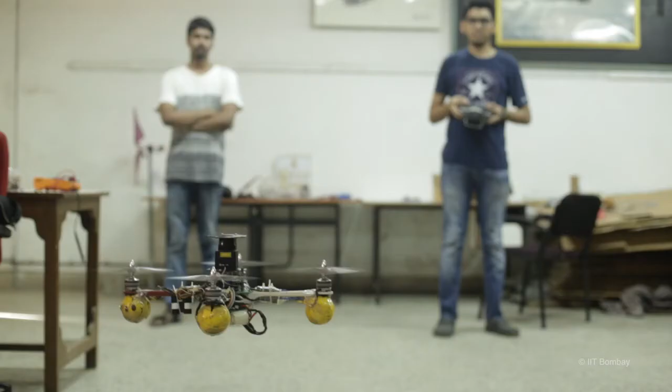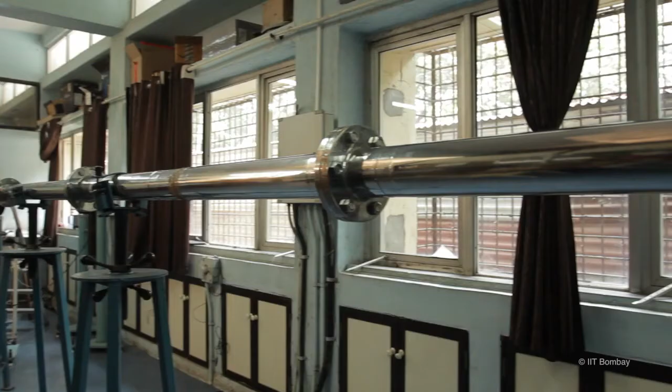Our faculty and students try to understand the mechanism behind these flying objects, and how to design and manufacture them. The discipline is divided into various sub-disciplines like aerodynamics, which deals with the forces generated because of air passing over a vehicle, propulsion, which gives thrust to the vehicle to travel, and dynamics and control, which is basically controlling the vehicle in air or on ground.

Aerodynamics deals with the motion of objects through air and the forces and moments that the air exerts on the body as it moves through air. For a typical commercial transport aircraft carrying 400 plus people and weighing about 400 tons, the primary aerodynamic forces one would be interested in are the lift force, which acts upwards and counteracts the weight of the aircraft, and the drag force, which acts like a penalty to moving an object through air.

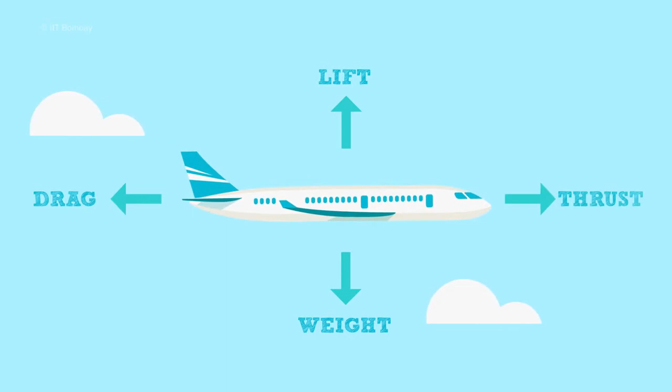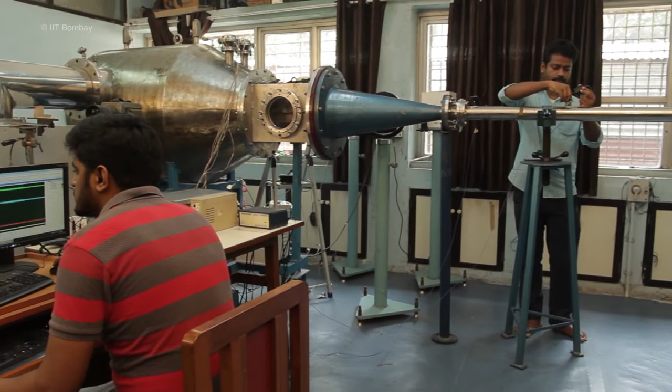The primary objective of a researcher in aerodynamics would be to design objects which produce the required lift force while at the same time maintaining minimum drag levels.

The propulsion problem is to make an engine that works efficiently over a wide range of conditions. We focus on a few aspects of this complex problem. An airplane engine generates thrust by adding energy to the air flowing through the engine, and this energy comes from the combustion of a fuel.

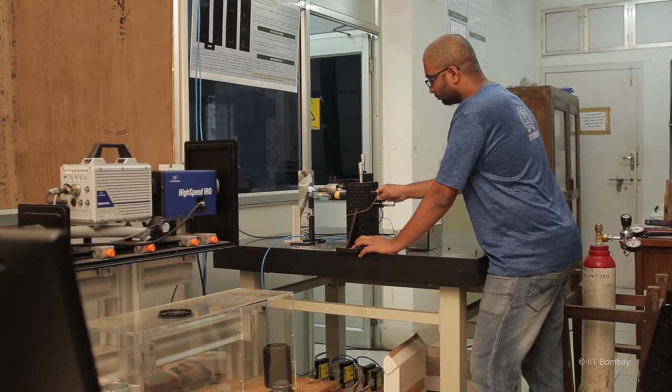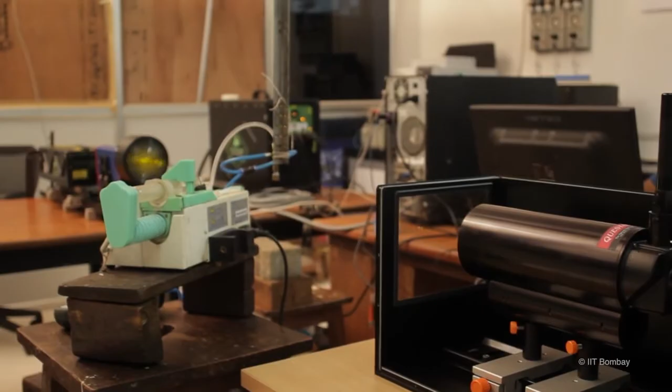Can we generate thrust with less pollution? The combustion groups are working on improvement in existing fuel injection strategies and novel concepts like flameless combustion to enhance engine performance. We are also interested in understanding the combustion instabilities that can cause engine failures.

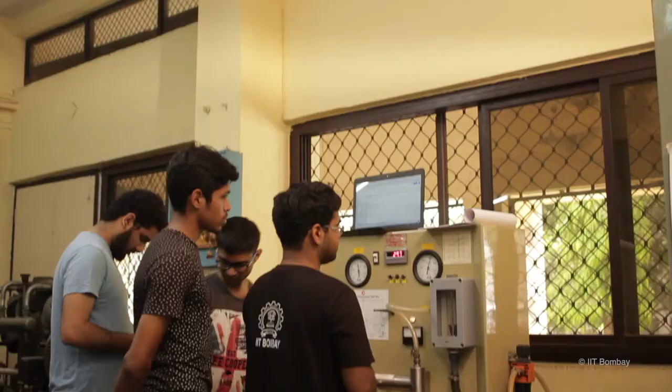Irrespective of the outside atmosphere or air, the air inside the combustor needs to be maintained at a condition where combustion is possible, and there is only a limited range where a turbomachine can meet these requirements. The turbomachinery group in our department is interested in understanding the intricate flow features of turbomachine flows to make them more efficient and to work with larger margin.

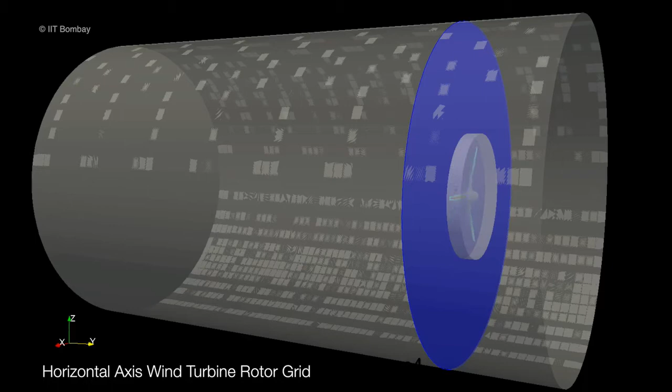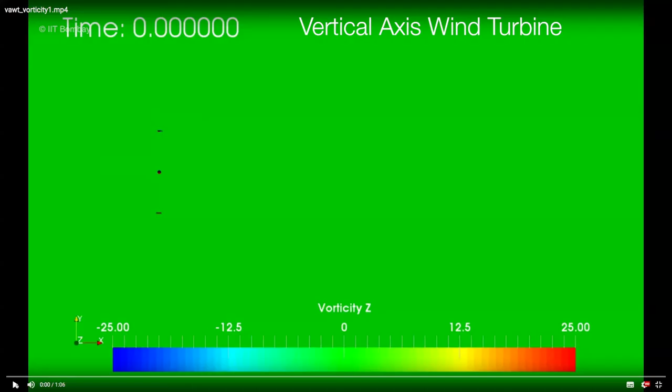A lot of present-day research requires simulating engineering problems on computers. Computational simulation can take an enormous amount of time even for small problems, so we often need to use multiple computers in tandem to solve some of these problems. We are broadly interested in trying to see if we can simulate these problems in a shorter amount of time with greater accuracy.

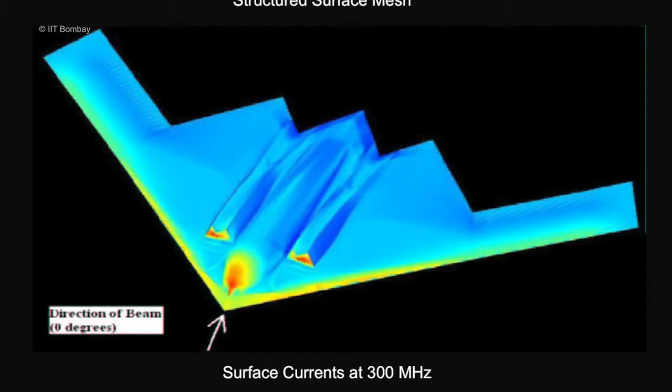We do this using two approaches. One is we use better numerical techniques that are more efficient and more accurate. The second is to use computational technology better, in terms of technology like GPUs, etc. Once we have these simulations, we need to visualize the results, so we also work on tools to visualize this data effectively.

Aerospace structures are driven by the twin objectives of high strength, stiffness, and lightweight. The Aerospace Structures Group is responsible for physically realizing the shape, or the aerodynamic shape, of the aircraft under a given set of minimum weight constraints.

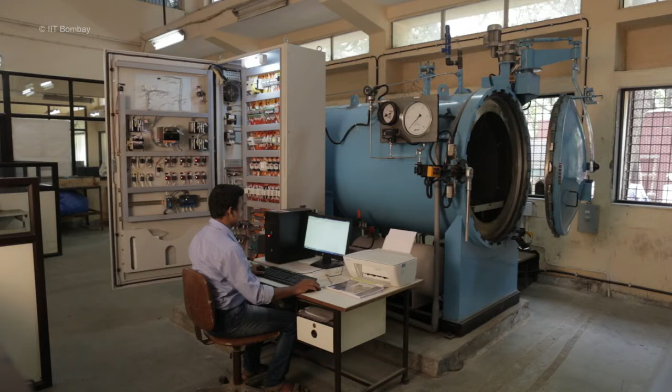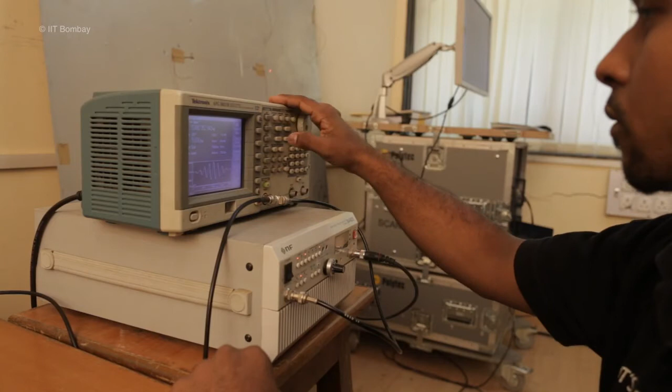They are also responsible for estimating the structural deflections as well as the structural strength under given static and dynamic loading conditions. As part of the structures curriculum, students are exposed to various numerical and analytical techniques, as well as the usage of advanced aerospace materials like composites and smart materials. The branch of aeroelasticity, which involves the study of aerodynamics, controls and structures, is also covered in the structures group.

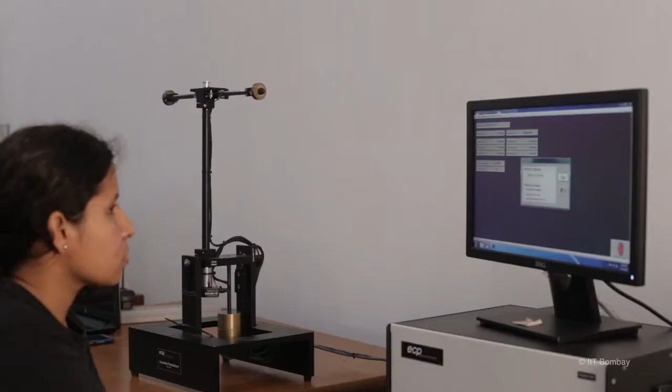Just like any other vehicle, aerospace vehicles such as aircraft, missiles, launch vehicles and spacecraft need to be controlled. The Dynamics and Control Group works to develop methodologies and tools that help in ensuring a desirable dynamical response from such aerospace and other non-aerospace systems.

This is achieved through development of algorithms for navigation and guidance, simulation platforms, and control strategies. The group also has a number of experimental facilities that help in verifying and validating the ideas.

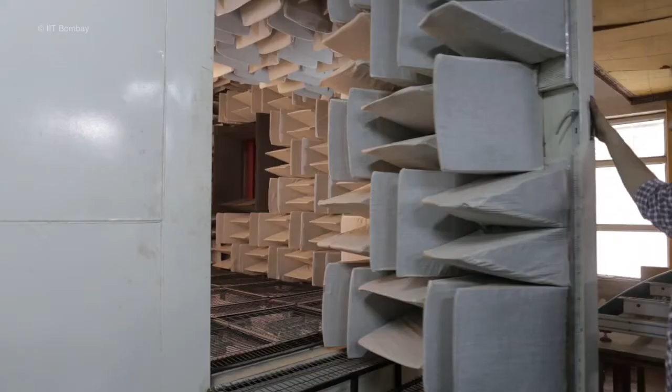Jet engine noise is a big problem for people living near airports. There are people working in this department on trying to understand this problem in enough detail to then try to reduce it. What about trying to reduce the visibility of aircrafts, especially to our enemies?

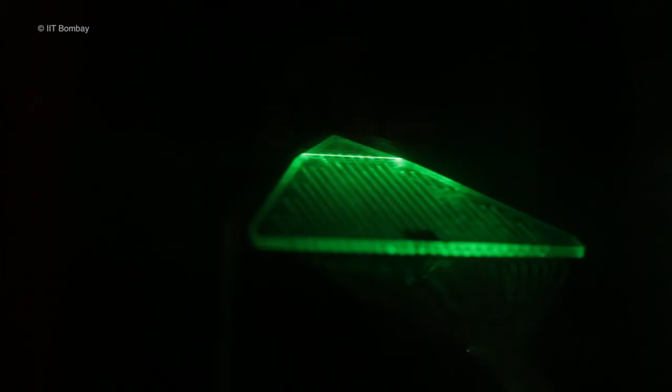Aircrafts are detected using their radar signature as well as the heat generated by the engine exhaust. There are faculty members in our department who are working on trying to understand this problem and then to work on designing aircrafts to reduce this problem also.

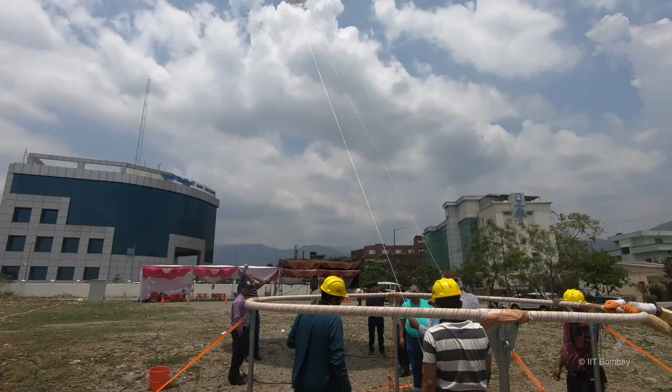Flight and flying has fascinated human beings since time immemorial, ever since they looked up at the sky and saw birds flying and wanted to imitate the same. And it has been in the last 200 years that we have come to a point where powered and unpowered flight is possible, and this subject continues to make rapid advances - and this is what we are involved in as a department.